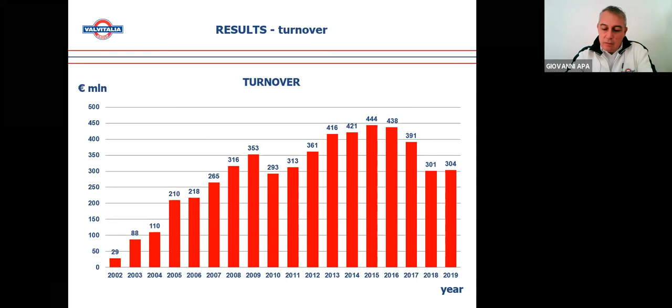The growth of the company has been very fast in the last 18 years. It's a relatively new company, established in 2002 by Mr. Ruggeri and his sons, and it grew throughout the years through acquisitions and market growth, especially in the oil and gas market. You can see a couple of drops during the years 2010 and 2018, according to the crisis in the oil and gas sector mainly.

The company is Italian, as I said before. We have 10 manufacturing plants: 7 are in Italy, but 3 are abroad - one in the UK, one in Canada, and one in China. We also have 3 representative offices in major markets for oil and gas: Houston, Abu Dhabi, and Algeria.

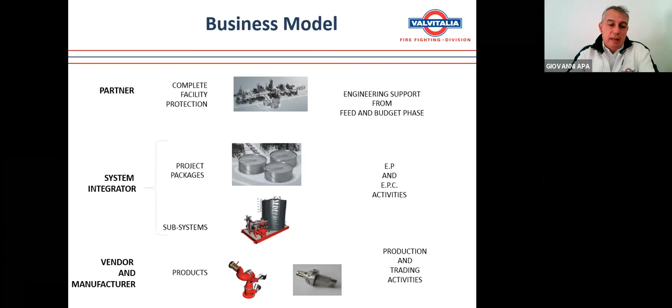Our business model, starting from the bottom of this chart, is simple supplier of products. So you have a photo here of our monitors, our nozzles. But basically we are a system integrator, so we assemble in our warehouse, in our plant, what we produce and what we buy from other suppliers, taking care of all the engineering and procurement activities, but many times also the installation and construction activities. That's why we are an EP and EPC company. As a system integrator, we can supply all the subsystems available to the market. I will show you later our products, and also a full project package to our client. Sometimes when the customer requires, we can also cooperate as a partner since the beginning, starting from the feed phase.

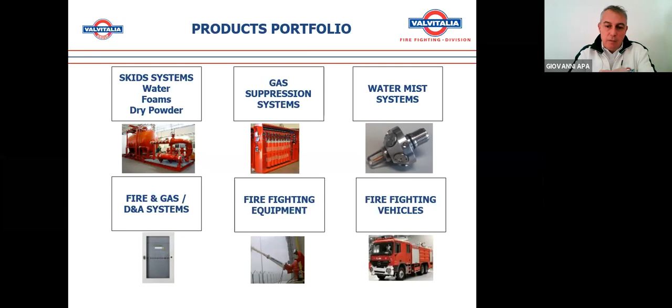What do we sell? We sell basically 6 product lines: skid systems, gas suppression systems, water mist systems, fire and gas detection and alarm systems, firefighting equipment, and firefighting vehicles. I will give you a snapshot of these products in the next few minutes.

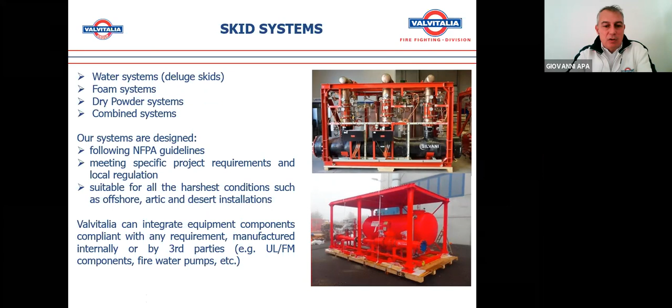Now I will go very fast through the product description of our firefighting division. Those are the skid systems. They are designed, produced, and generated in our company, and they are compliant with all the regulations of each country where they need to be installed. We can have also UL, FM, and VDS approval, so we are very specialized to all the requirements of the market.

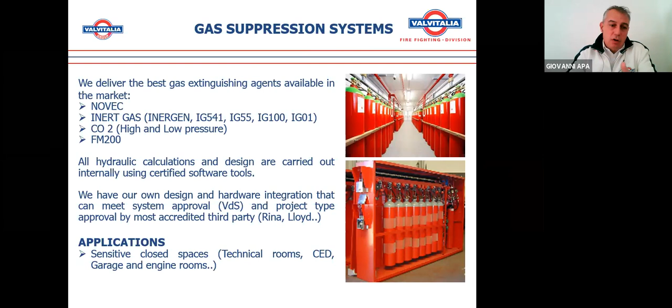This is maybe the most common firefighting system, the gas suppression system. Again, here we take care of all the hydraulic calculation, engineering, design, and then we finish with the test and commissioning of the system on site. We are able to supply all the gases available on the market, so Novec, Inergen, CO2, FM200.

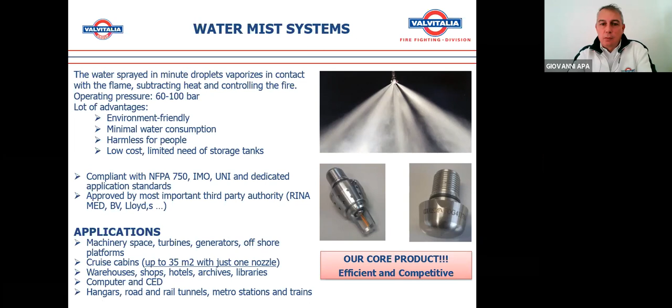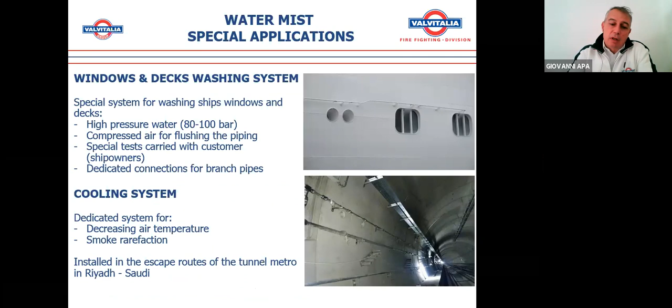This is maybe the core product of Valvitalia firefighting division, the water mist system. We are one of the few companies in the world able to produce, design, and supply this kind of system, and this is used on trains, as Marco will explain later. This is the classic water mist system, of course for shutdown of fire, but there are also special applications, like what we call the window washing system, used to clean the windows of ships, or the cooling system, shown in the bottom part of this chart, that is installed now in the Riyadh metro in Saudi Arabia.

The fire and gas detection alarm system is made in our plant, designed by us, a fully configurable, modular system, with very strong compliance with many regulations available worldwide.

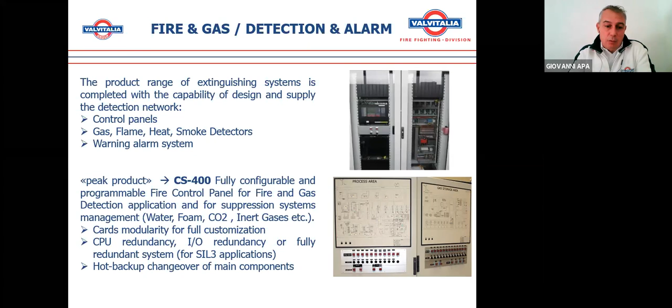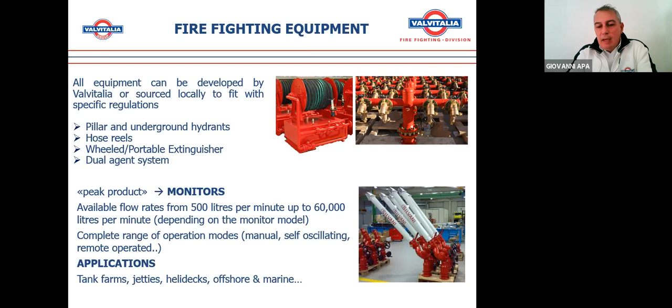We call it CS 400, this is the firefighting equipment. Some of these we produce. We are very proud to produce the biggest monitor in the market, we call it Jaguar, able to flow at a rate of about 60,000 liters per minute. Some of these we make, some we trade, because we have a very long history on the market.

And then finally, this is a very niche product, the firefighting truck vehicles, trucks that are very particular, just for the refineries. We buy the chassis from the major producer and then we set up all the firefighting equipment. So I just took 10 minutes to introduce the company and the products.

I will leave now with the video of our testing area, because as I told before, we have in our facilities one of the biggest testing areas in Europe. So luckily, maybe not many of us have seen the firefighting system in function, because if this happens, it means there is a fire in place. But we test all our systems, so now I will leave you with this video, and then the floor will be Marco's. Thank you again, and I'm here for any question and answer you need. Thank you very much.

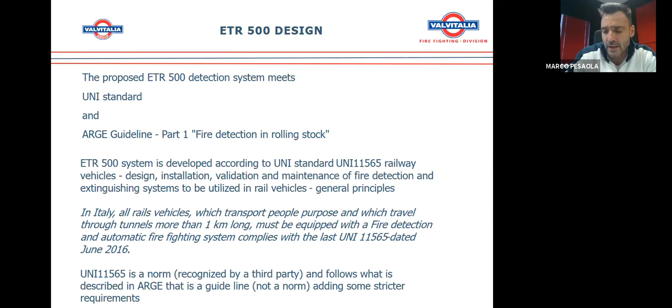The Italian standard also requires that the system is approved and qualified by a third party, also described in the standard. We have to follow not only this Italian standard, but for this specific project also two main specifications issued by the main Italian operator, Trenitalia. The operator issued these standards in order to have common features between all the firefighting systems installed on board their fleet. So, consistent with the Italian standard and all other applicable standards, but also in other parts, the system should follow some strict specifications.

The first specification is totally dedicated to the control system and detection system. This specification is commonly called SCIA. Another specification clearly describes the main details of the detection and extinguishing system that can be installed on board the various species of vehicle.

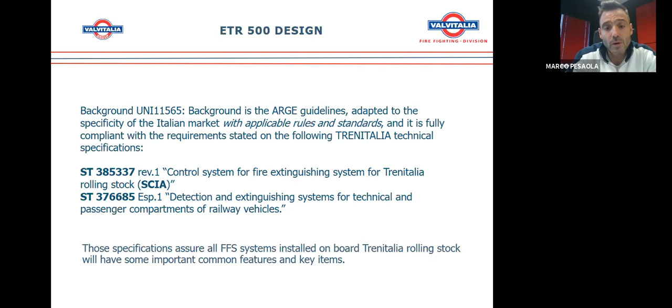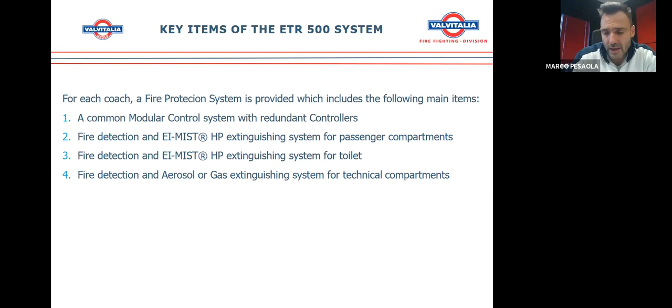These specifications describe, from point one, a modular control system equipped with redundant controllers, because on board the train, redundancy of the main controller is very important. Passenger compartments as well as toilets have to be equipped with a water mist system and relevant detection system, while the many technical spaces and technical lockers on board the train have to be equipped with fire detection and an extinguishing system that could be aerosol or any suitable gas extinguishing system according to European standard. In our project, due to the particular technical spaces, we designed an aerosol system with thermal cables as detection system.

Those specifications also have strict requirements for the detectors. The detectors have to be very smart, their output has to be serial type, so their threshold can be set at different levels according to project requirements and the different areas on board the train. For example, in the area of the entrance doors there is the possibility of more smoke presence, or in the galleys and kitchen the threshold has to be adjusted. So for both smoke and temperature, the detectors we have used can be modified and calibrated according to the tests done after installation of the system.

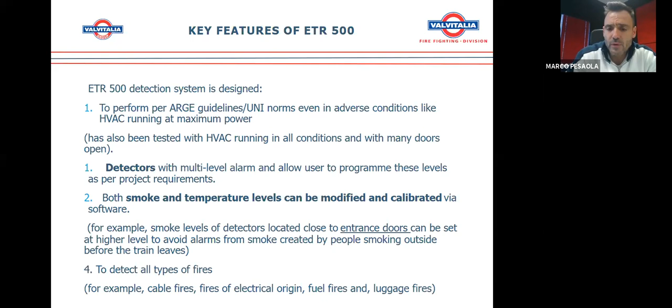Also, the detection have to be able to detect all possible types of fires, because we can have fire created by cable, by luggage, or even by fuel if there is the possibility of an arsonist. So there are different types of detectors located in different areas.

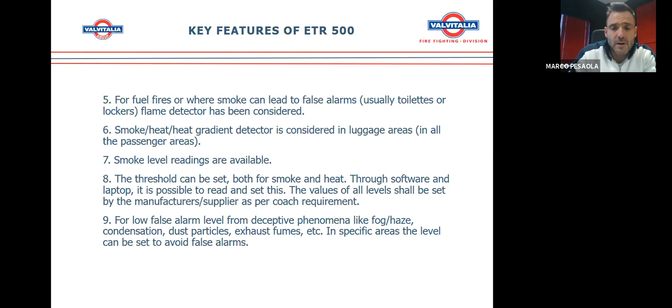So in the passenger area, we have thermal and smoke detection, while, for example, in the toilets, we used flame and thermal detectors, of course, in order to avoid false alarm. But what is important is that all these detectors can be set at different thresholds in order to cancel any possibility of false alarms. That, of course, is of paramount importance on board the trains, because we can have dust,

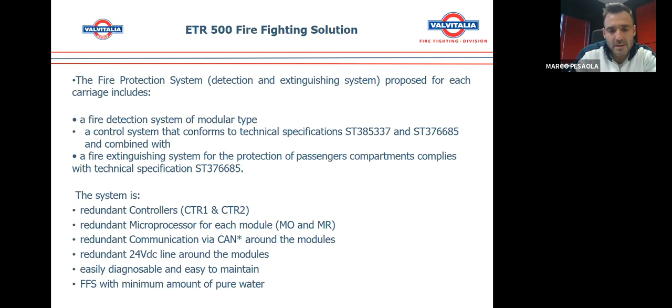Of course, also the power supply is redundant, and the firefighting system has been designed in order to limit at the maximum the amount of water needed for the extinguishing activity, because of course on board such vehicles, and this one in particular was an existing fleet of train, of course it is very important to limit the space needed to locate the firefighting equipment.

We are seeing now a very general scheme of the system. So we can see on the left that we have a space where the water mist equipment is located, and along standard type of coach, there are in this fleet, in the ETR 500, there are several types, of course, of coaches. There is the standard coach, the economy coach, the business. So we have to basically design five different configurations, but this is the most standard.

So as we can see, the passenger area is divided basically in 5 zones. Each zone is controlled by a nozzle, and the water mist discharged by the nozzle is activated by a control valve, and the control valve is totally monitored by a dedicated module. So when I speak about modular configuration of the control system, exactly this is the meaning. So each zone is controlled by a module.

Also the extinguishing equipment, the water mist package, is controlled by its own output module, and the water mist system dedicated for the protection of the toilet that you can see on the right of the picture is monitored and managed by its own module. So in total, more or less, we have about 8 water mist nozzles in each coach, and about 15 detectors. We will see better some details about that.

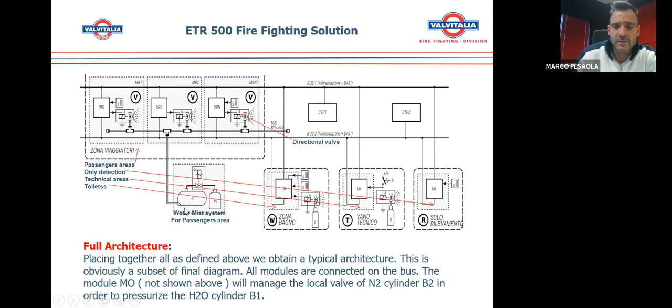Another one is called the output module and receives signals from the controllers, and when there is actually a fire, has the task to activate the firefighting system. This is in general how the system is designed.

So all the modules that we have seen are connected by a redundant CAN bus. So in case of fault in any part, the system is still alive. We have the 2 controllers connected by CAN bus. The 2 controllers are in dialogue with the train with a double Ethernet connection.

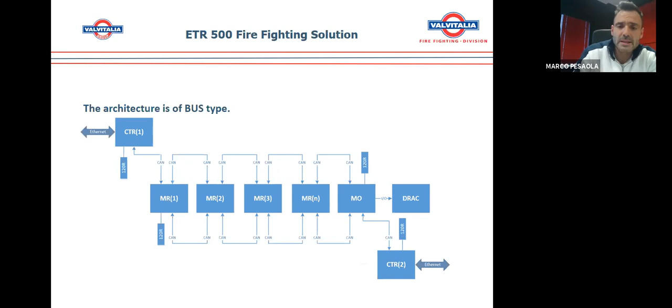So all the coaches are connected together via Ethernet, and all the information is also sent to the maintenance location of Trenitalia by a web app that we have designed. So all the alarms and all the faults also are transferred by web to a cloud and then to the maintenance facility of Trenitalia. So this is a brief list of the controllers and modules.

I would like to focus on the detectors. In this project, one single detector is able to measure 3 characteristics of the fire. The same detector can actually receive smoke, temperature, and temperature gradient.

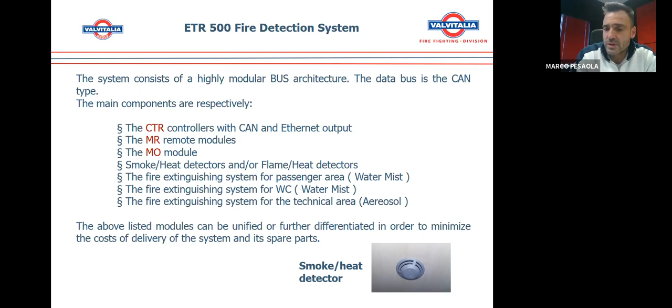So we can also measure the variation in temperature in 1 second. Combining these 3 characteristics, the controller is able to detect whether there is just a pre-alarm or actually a condition of fire. So the system can start extinguishing in, for example, zone 1 at the beginning of the coach, or zone 3 in the middle of the coach. Combining these 3 measurements, the system can activate 1 single zone up to 2 zones maximum - 2 contiguous zones, meaning 2 nozzles can be activated at the same time when fire condition is detected by 2 detectors belonging to different contiguous areas.

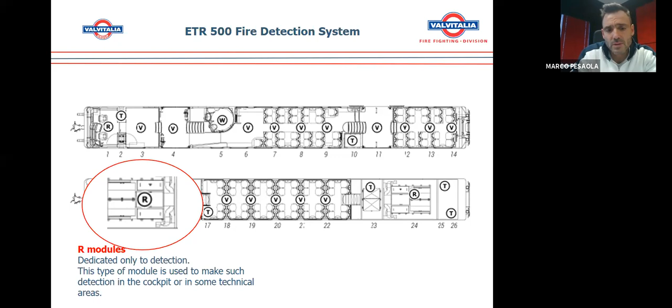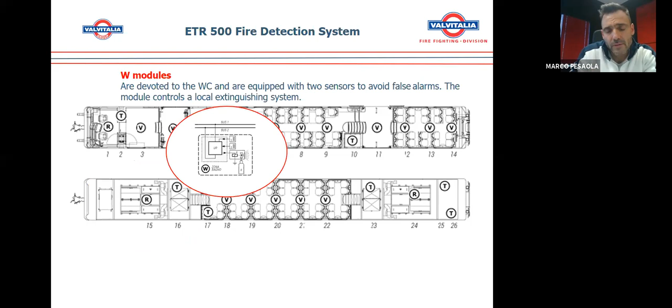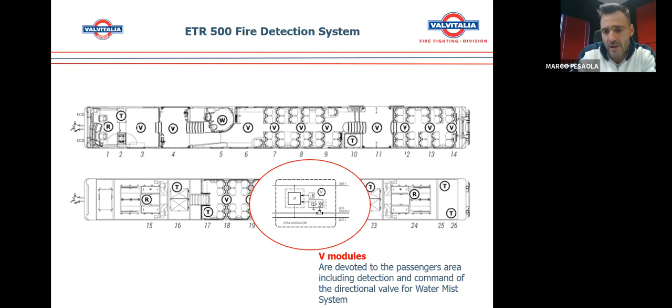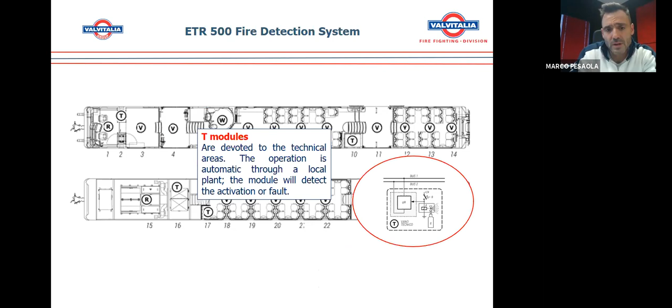Let's focus a bit on this, because the control system is one of the main parts of an automatic firefighting system on board the train. We have the R module dedicated only to detection, and the W module for the toilet, where differently from other areas we also have flame detectors and a dedicated cylinder for the water mist firefighting system. Then we have the V modules, the most common one for passenger areas - they receive signals from detectors and activate the relevant zone. And we have the T modules that control the aerosol and thermal cable for the technical space.

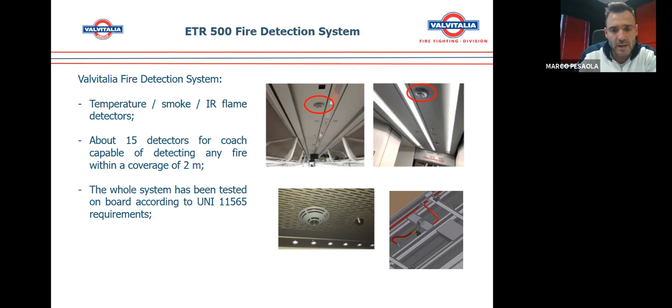Regarding the fire suppression system, we have a nitrogen cylinder for the propellant needed to pressurize the water, and a water cylinder. At the end of the design, the amount of water stored in the water cylinder was limited by successful fire tests to 80 liters.

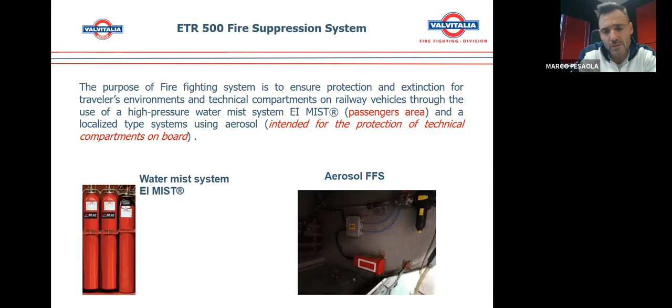In the technical spaces, each one needs to be protected by fire detection and fire extinguishing according to the Italian standard. We have 1 or 2 aerosol modules activated according to the fire condition detected by a thermal cable. The reason for choosing water mist in this application is due to the very fast level of protection achievable in very few seconds once the water mist discharge starts. The water mist also floods the entire wagon, providing cooling, inertization, and screening of the fire.

It's very important to achieve the 15 minutes of tenability of the coach required by the standard, in order to protect passengers for a minimum of 15 minutes. The high-pressure system we've installed ranges from 60 bar minimum at the nozzle to a maximum of 120 bar.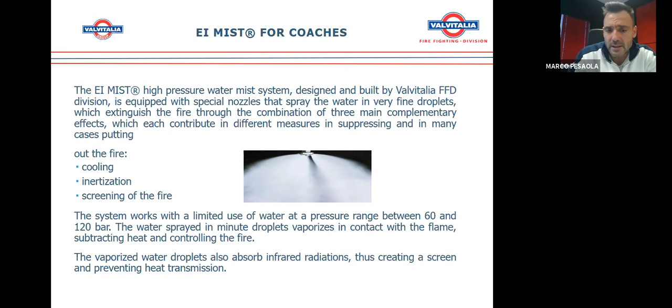So the 3 main tasks we faced for this project are: fire detection, which I described before, needing to be very fast, reliable, and most of all localized - smart enough to understand and indicate exactly where the fire is within the 5 zones each coach is divided into. Then the water mist system, because we had to improve a lot on our existing water mist system installed for oil and gas and marine applications, since railway requires specific characteristics. And lastly, the full-scale fire tests.

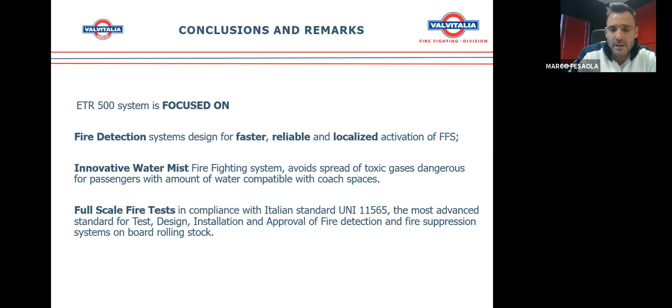This system has also been totally tested and certified in an Italian accredited laboratory, in order to assess that the extinguishing capability was consistent with the Italian standard.

Now let's have a look at the real equipment and how it works, and also at the physical control panel, in this short video we recorded in 2017 in Milan during the railway exhibition. It lasts a couple of minutes.

Mark might have to try that again. Marco, can you hear me? Yes, it's not coming up again. Do you want to share the video? Actually, bring it back up. If you share screen again, you'll be able to go to the video and play it. Just close the PowerPoint and share the video, clicking on it with the share screen.

It worked before we began, so. Okay, let's have the video here. Just click on the video and it will play. Can you see it? No, we can't see it. Do you want to close the PowerPoint? Okay, let me try again from the beginning, share the video again. No, it's not coming up. Why is it doing that?

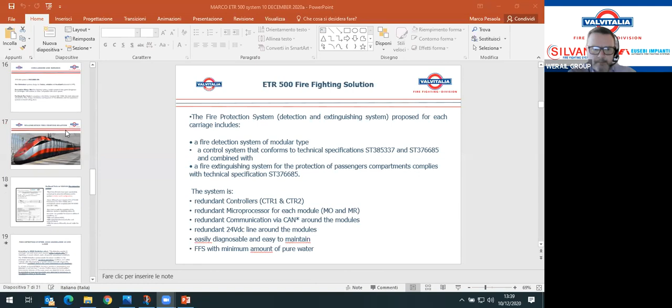Have you shared the screen? Yes. No, it's not coming up, I'm afraid. I don't know why it's doing that again. Okay, let me try to close the PowerPoint. Maybe let's restart the PowerPoint. Okay. Can you see it now? I can see the PowerPoint that you've brought back up. Okay, so let's start from here. There we go. Perfect.

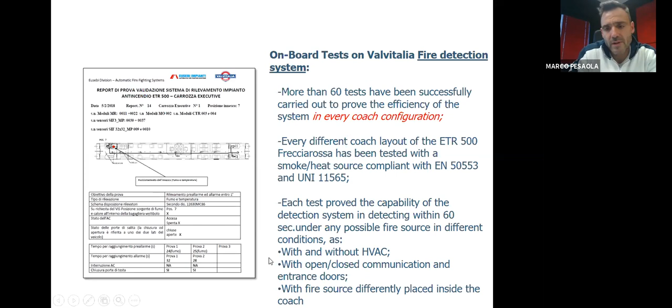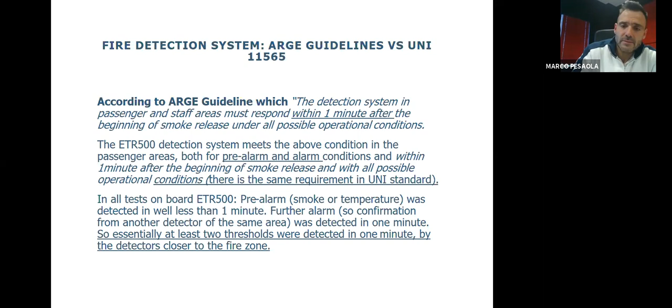In total, we have done more than 60 real fire tests, changing the various environmental conditions. What is very important is that in each of these tests, according to the standards, the detection system has to receive a pre-alarm signal within 1 minute, but also an alarm signal by 1 minute. This is actually very, very challenging because the system has to be very smart, and this is most of the job we have done, to work out the software of the detection system that was needed to very quickly understand where the fire was located.

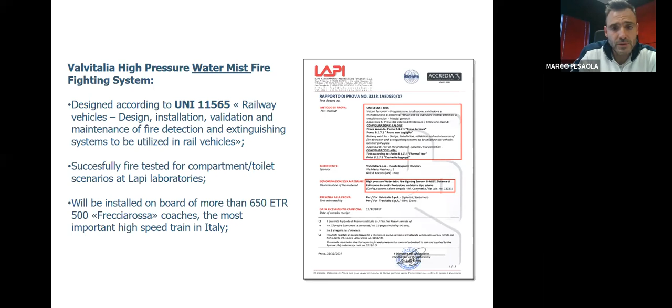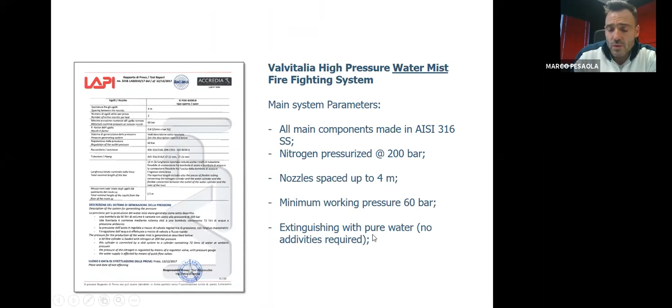One look at the validation of the firefighting system that, as said, we have done at the LAPI laboratory in Italy. We have done fire tests to prove that the same condition installed on board was able to meet the standard criteria. So we validated the nozzle spacing, most of all, and the minimum working pressure at the nozzle, that is 60 bar, and the use of pure water, because no additives are actually allowed.

During the test, for the entire duration of 15 minutes, the system has to be able to maintain a temperature lower than 65 degrees C, and also the concentration of the toxic gases has to remain lower than the maximum allowed by the standard.

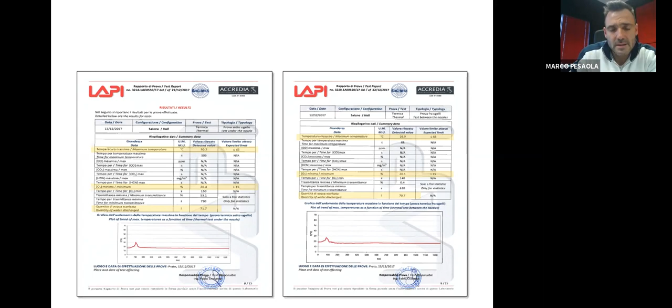There are different configurations foreseen by the Italian standard: the hall configuration for the passenger areas, the compartment configuration for the toilets, and another for lockers. So the Italian standard is very precise in describing the conditions the fire tests have to be carried out in, and the documentation and reports to be produced.

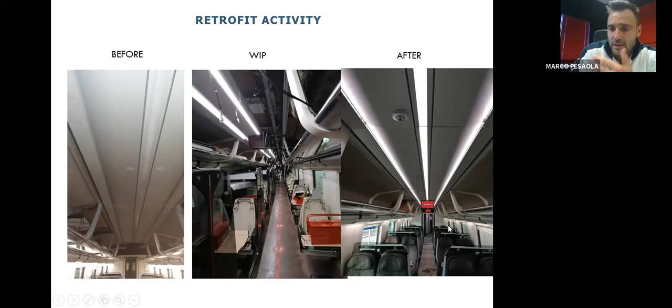As said, this activity has been done on an existing train while it was undergoing ordinary maintenance. So we can see that starting from the existing ceiling, we removed the ceiling and then modified it while installing cables, modules, piping and nozzles. On the right, you can see the final configuration of the coach as it is today while it's traveling.

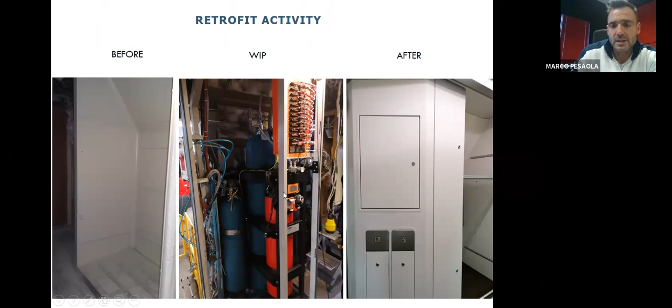The other difficult task was actually to find a place for the cylinders. This is the typical water and nitrogen package, and the orange one is the control panel. So we modified an existing luggage area, only taking a little bit of it, and you can see on the right the actual configuration. We still have a luggage area, but in this locker we have all the equipment you can see in the middle. Just a final look at two very important tasks of railway firefighting projects.

So the SIL level and the RAMS. According to the Italian standard, the detection system and the electronic actuation of the firefighting system have to have a reliability level up to SIL 2, because of course the system always has to be available when there is a fire.

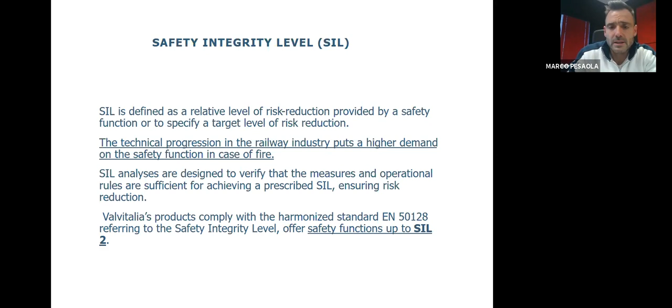So we have to execute several tests in various laboratories to assess that our system was at least able to reach the SIL 2 level.

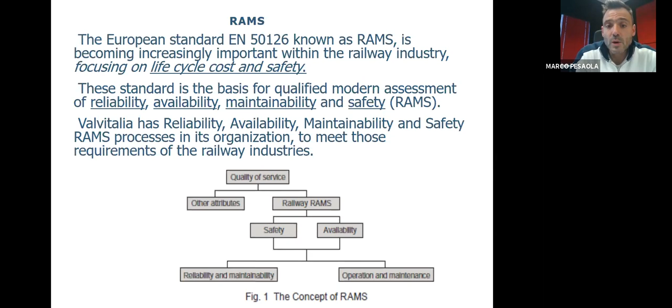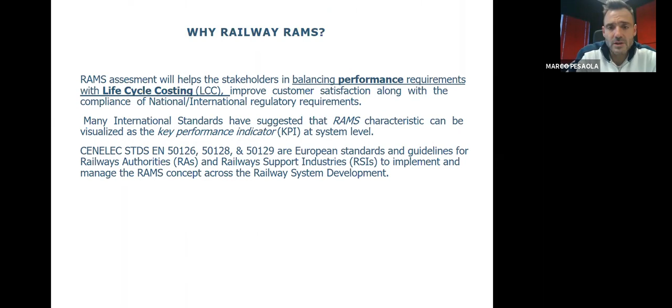The other important characteristic is the RAMS - very important today, and also a specific requirement of the Italian standard. The firefighting and detection system have to demonstrate reliability, availability, maintainability, and safety according to the levels required by the European standard EN 50126. This is very important because operators need to be sure that the life cycle costing of the system we are going to install is inside certain parameters. So RAMS is definitely a key performance indicator that is on the attention of most operators and railway authorities nowadays.

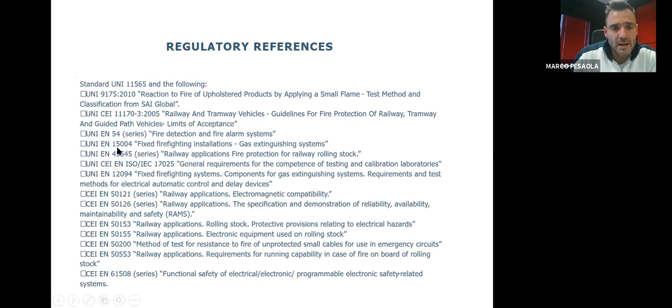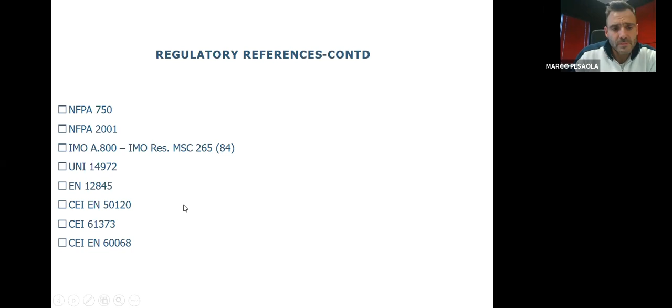In conclusion, this kind of project not only has to take into consideration typical railway standards, but also has to make reference to civil firefighting standards such as EN 54, EN 15004 for gas extinguishing systems, and also international water mist standards such as NFPA 750, but also marine standards, because that's the base where water mist technology started about 20 years ago. So IMO 800 and IMO resolution 265 are also references for the fire test scenarios in the Italian standard. This is a final evaluation on the reference standards.